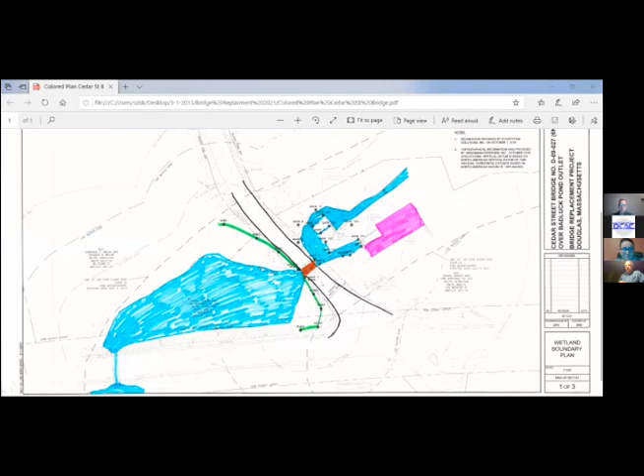A couple of years ago, Massachusetts started a small bridge program, and the town was awarded a grant in the amount of $500,000 in 2019, so that's where we're starting. The current bridge is only 17 feet wide, and our current design calls for a 24-foot wide structure—it's going to be a four-sided box culvert.

So, 24 feet wide. We did actually look at something wider to allow for better pedestrian access, but the environmental impacts going beyond 24 feet are quite significant. So 24 feet is a lot better right now than the 17 feet that's out there, in terms of both traffic and at least pedestrians walking across the bridge.

We are also widening the roadway a little bit down towards Webster Street. We're actually closing off one of the radii, as you're taking a right turn from Webster down to Cedar Street, so you can do that at a good speed. We're cutting back a lot on that radius, which is pretty much turning the existing pavement out there back to loam and seed that area at the bottom.

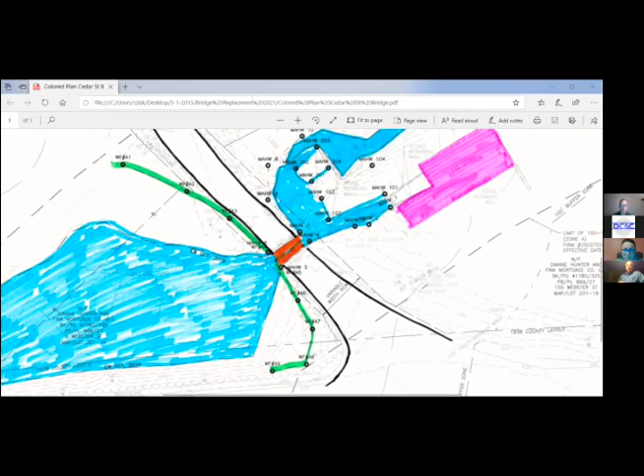And then towards the top too, we're doing a little bit of widening. If you're familiar with that, especially coming southbound, you're almost on a blind curve, both vertical and horizontal, so we're doing a little bit of widening there. I guess there's been a few accidents, and I want to say the town administrator either got into an accident there or was pretty close to doing it.

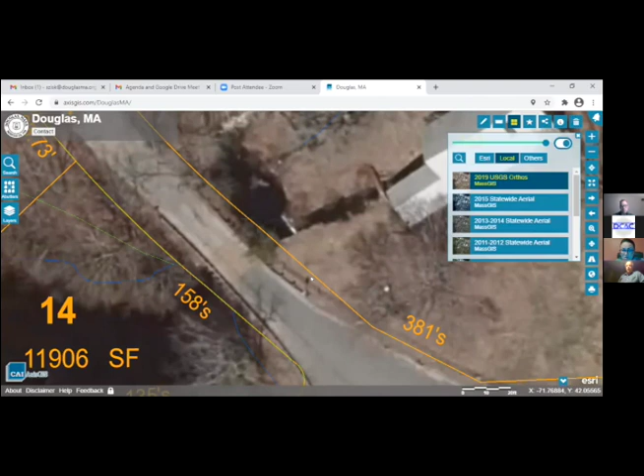So he was advocating to widen out that corner a little bit. We did as much as possible, but we can't do much - we wanted to keep the alignment of the bridge itself. And if you notice, and Kim will get into it, and Ken a little bit more, we're holding the east side of the bridge where it presently is. We didn't want to impact any of the property associated with the old mill, plus as you get into that area, we're dealing with some old retaining walls going into the raceway down to the mill and also to the dam on that side. So all of our widening is actually along the west side of the roadway.

Town meeting voted - there were some takings involved and some permanent and temporary easements - and town meeting voted on that a few weeks ago. And actually all the layouts were recorded just last week at the Registry of Deeds.

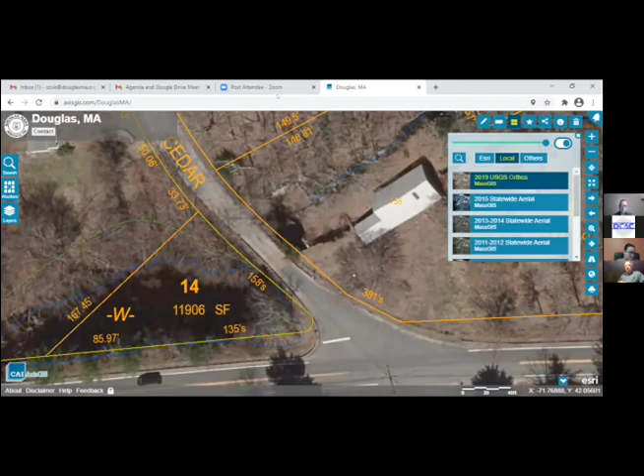I want to turn it over a little bit to Kim Armstrong. Oh, before I forget - Tracy, you were talking about, we do have copies of Mcguire's original design for the 2011 bridge, I don't know if that helps. We don't have any as-builts, but we have the original. Okay, could you just forward those to Steve? Yeah, he'll just pop them in our Google Drive. Sure.

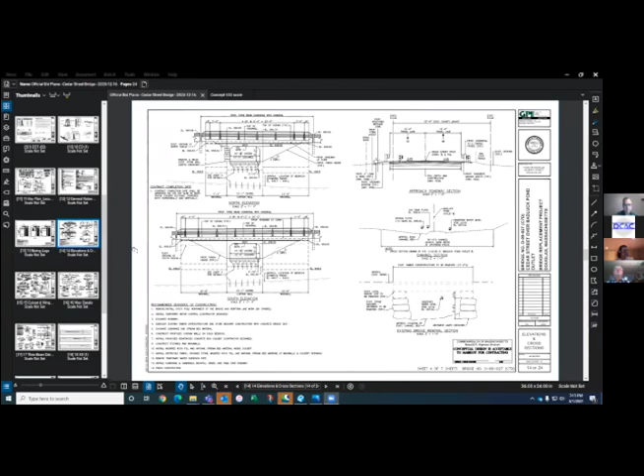Okay, so can everyone see my screen? Yes, should be a plan view. So this is basically what we're putting back for an elevation view of the bridge. So it's a four-sided box. The reason we actually did that is because it's scour stable.

And according to our geotechnical investigation, the bedrock's actually pretty high, so we can pin it into bedrock and cut off scour on both sides. So for future maintenance, there should be none associated with this one. We're also coming back in with retaining walls, mainly just so we can put the highway guardrail transition - I'm sorry, the highway guardrail itself, on top of the rails, just to help protect the roadway.

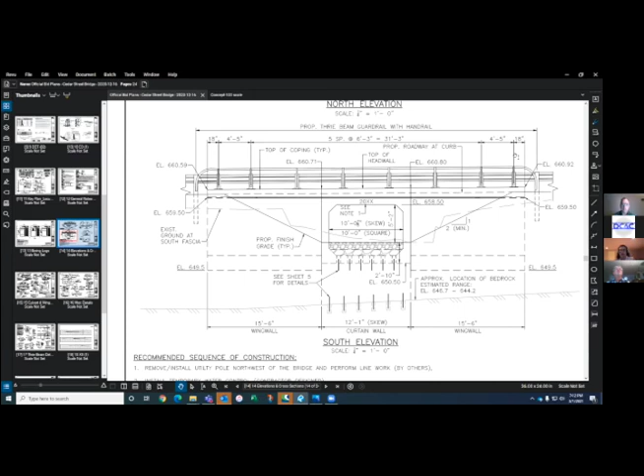We did what we could to minimize impacts. There is some stone that's going in on the openings, really just to kind of help armor the approaches to it and to help protect those retaining walls. And then we have - this is where we're anticipating the water control actually be installed, and then they're going to use a bypass pipe in order to have temporary water flow through here. That's what this is right here. I don't know if you can see my mouse, but...

I guess I don't know what you want to know, but I can keep going if there's any questions. No, I think if you just kind of focus in on the impacts - the increase in impacts, the percentages - if you want to just give us a general overview on the expansion versus the existing, versus your expansion into the resource areas. Okay, Kenny, I think that you're actually probably better at that.

I can pull up the - or if you want a screen share, that's fine too. If you're trying to talk, you're still muted. Yeah, okay. Do you have access to the three wetland sheets, Kim? I do, give me 2 seconds. Why don't we pull up the first one that has the multiple resource areas there?

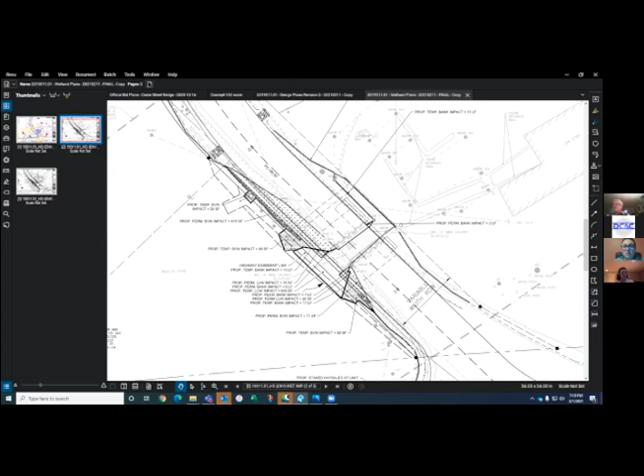I'm looking at the work around the edge. I see there's a 20 square foot impact to the BVW. Is that just on that side, or is that the whole project?

Actually, don't we have a chart? Looks like each one of these kind of outriggings of the structure has a BVW impact of various numbers of square feet. It looked like they're quantified there. Right, wherever the arrow points to is where that specific impact is.

Okay, so the project isn't just the bridge, it's whatever needs to be added to reinforce that chunk of road. Correct. This section here is for our utility pole.

So is this more like a retaining wall structure, or is this going to be an incredibly steep slope? There's going to be retaining walls on the sides of it in order to minimize the slopes. Okay.

And you can see the total impact area on the left side underneath the legend. Yeah, right there. I'm sorry I didn't review this before, I'm sure a lot of our questions can be answered on the prints. No, it's no problem.

Okay, so there's no riprap in this project at all, it's either just retaining wall and the impact has been reduced because you're surrounded by wetlands. There is some riprap as far as going through the stream at the openings. We are armoring right at the opening of it, but we're covering it with natural stream bed material.

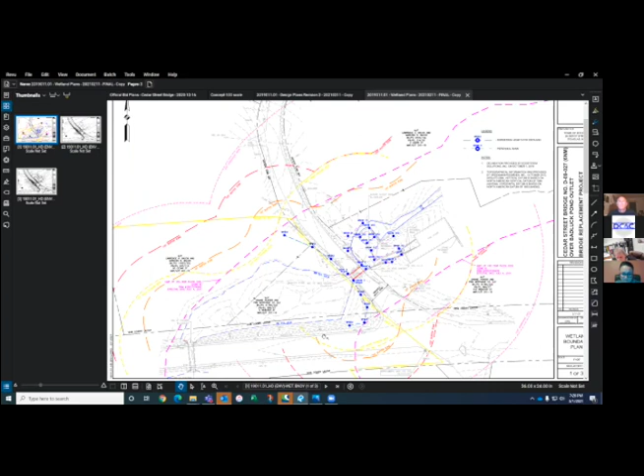Starting with the culvert itself, you have a bank area associated with that, identified by mean high water flags 1 through about 10. Then we have the bank area associated with the surveyed high water mark of Bad Luck Pond, done in October of 2019. Associated with that bank area, we also have BVW areas, defined by the wet flags A1 through A9.

Overlaying that, we are within a mapped FEMA flood zone, and we also have riverfront area associated with the bank areas. We also have a natural heritage overlay over the pond area on the westerly side, which you should have in your files. We have the sign-off from the Natural Heritage and Endangered Species Program for the portion of the work within that resource area.

Hello, Steve, yeah, or anybody? Steve, did you get the correspondence from Natural Heritage? I believe I forwarded that on to all the members. Okay, so I think the only thing we're really waiting on right now is comments from the DEP and the issuance of the file number.

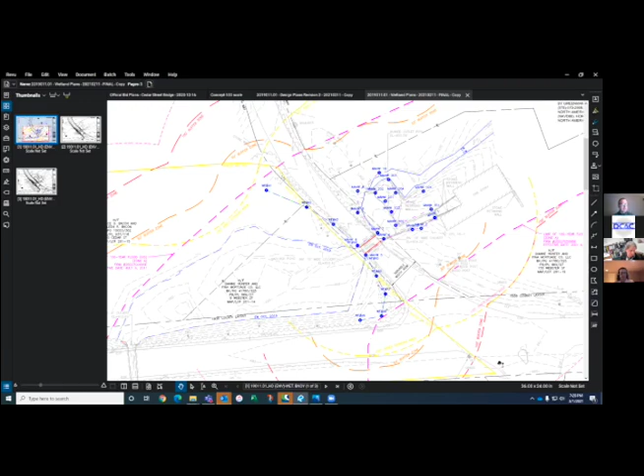So if we could go to the next sheet, the wetland impact plan. There we go.

What we've done, keeping it in the simplest terms, let's start with the BVW, because it's really associated with the widening of the roadway, a requirement of Mass DOT under the Chapter 85 review. This stippled area is basically the area of BVW that's unavoidable - we're going to have a permanent impact of 486 square feet. We intentionally kept that under the 500 square foot threshold, which under 310 CMR 10.55 allows the commission at their discretion to permit alteration of up to 500 square feet of wetland without requiring replication.

We've had situations on similar projects where clearing trees to plant trees or vegetation just doesn't make much sense. You've got a sustainable wetland system around that pond, and to go in there and alter the buffer zone, regrade, and create a wetland replication for an area we've kept under the threshold within permissible limits just didn't make too much sense. But I'll defer to the commission's judgment on this after you've seen the site and taken a look at the conditions out there.

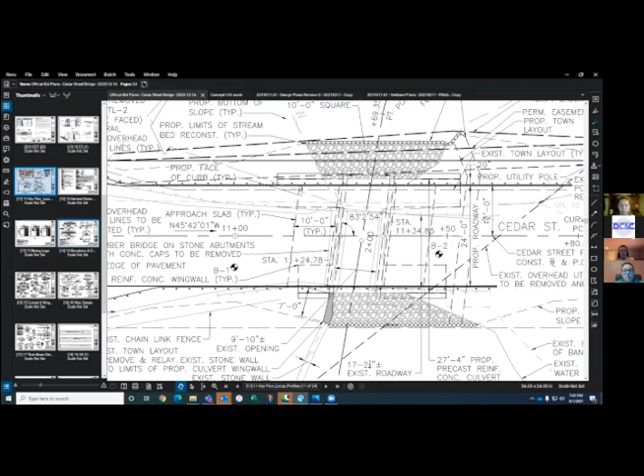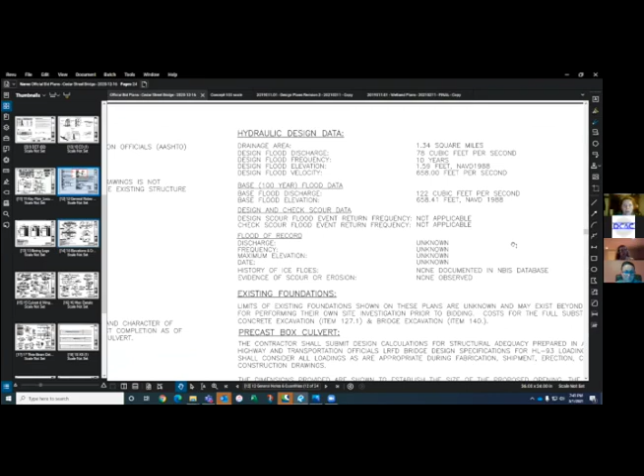Quick question, since this is a large file - do you have flow rates in this plan somewhere? They're in the hydraulic report. Actually, on the next page after this one, we have notes with the hydraulic design data and flows. It's page 12, if that helps.

Is there going to be any impact on any trees with this project?

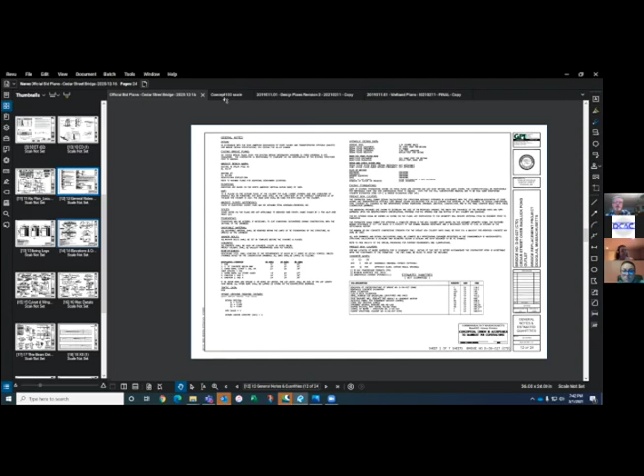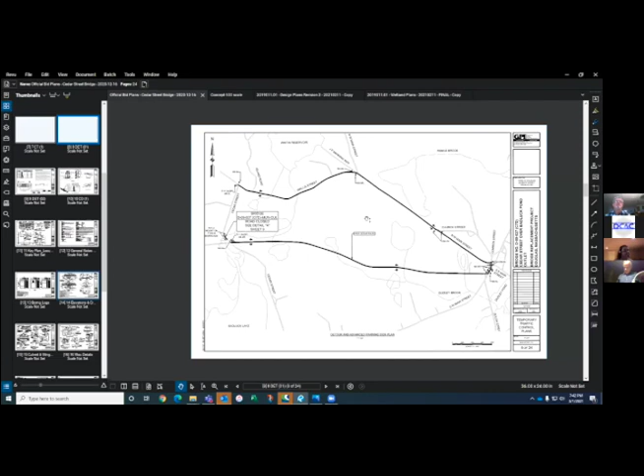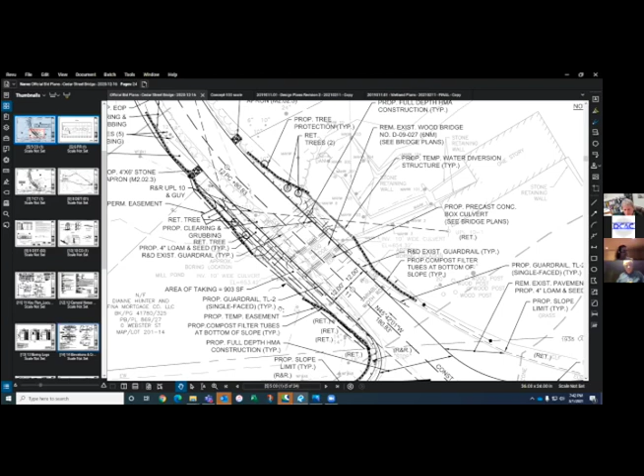Kim, it's Jim Noyes. Let me pull up that plan - I think it's sheet 5 on our plans, the construction plan. There's a cluster of 2 to 3 trees down towards here that are being retained. Let me go a little higher up - there they are, remove trees. There's 4 or 5 trees right as you're coming south, right before the bridge. There's a little wall on that Bacon property - if anybody's familiar with that area - but there's 4 or 5 trees there that need to come out, with a little bit of clearing and grubbing.

Okay, Art, are you good for now? Well, I see the 5 trees that you're talking about. Are you going to replace them after the project's completed?

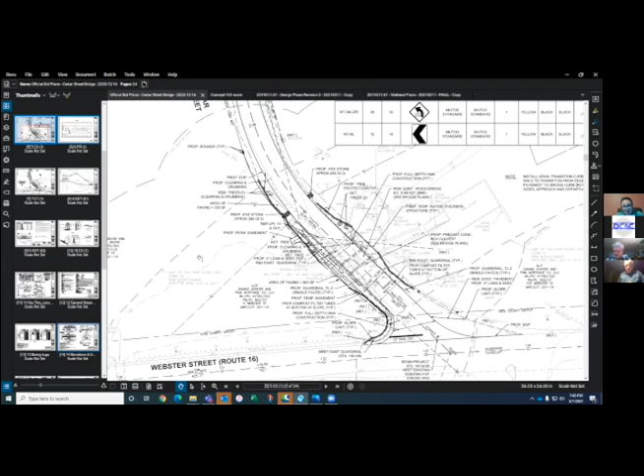It's something that can be considered. We hadn't considered it, but yeah, it's something that can be considered. They shouldn't be anywhere near the bridge though, for the replacement. Otherwise, we'll be back in a few years. So alternatively, where would you want to see them plant the trees that would have the same equal benefit that those trees are giving right now?

Yeah, there's no DEP number issued. Also, DEP does have those proposed alterations and replacement like you had submitted. So I would just get an answer before March 15th on what their opinion is on that, because it does look like you're altering and then you're replacing the same. So if you could just double check with them, because it is on the DEP website.

Thank you. And Tracy, can we just ask the applicants to submit the green cards, if they can scan them and send them to me with the abutters list? Yeah, applicant, send those over. I thought that was on the checklist, that it was done. The NOI checklist - yeah, they sent the abutters list. I didn't get the green cards back. I don't know where they are. Okay, yeah, I have them here. Could you scan them and email them? Yep, will do. It says the first one, green card submitted, X. Okay, all right, good.

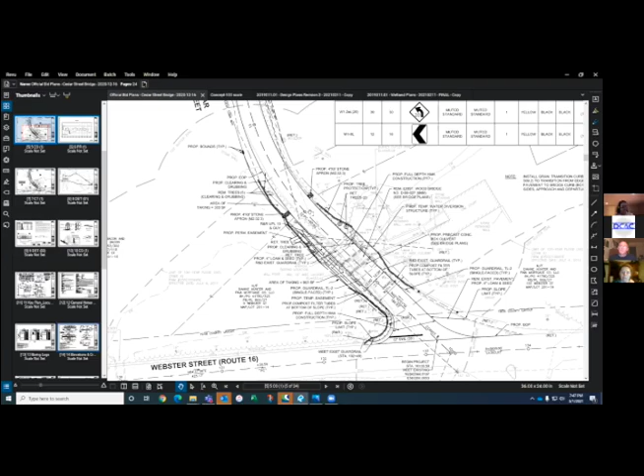And is there a retaining wall on the other side? Yes, all 4 corners required a retaining wall. Some of them are shorter than others. I can go back to my plan, it shows it better. This is the foundation plan, it kind of shows it a little easier, but all four corners have a wall.

It's such a historic area. Town may not care about aesthetics, but I kind of do. Is there any option to do a vegetated finish on that wall face? We try really hard not to put plants on the walls just to help them last a little longer. Right, I'm just throwing it out there. Again, we could ask the contractor about a form liner and see if that changes anything, but I don't want to tell you yes we can, because that'd be something the town would have to make the decision on.

I mean, I think it is what it is. It's number one, safety. So, I'm just throwing it out there.

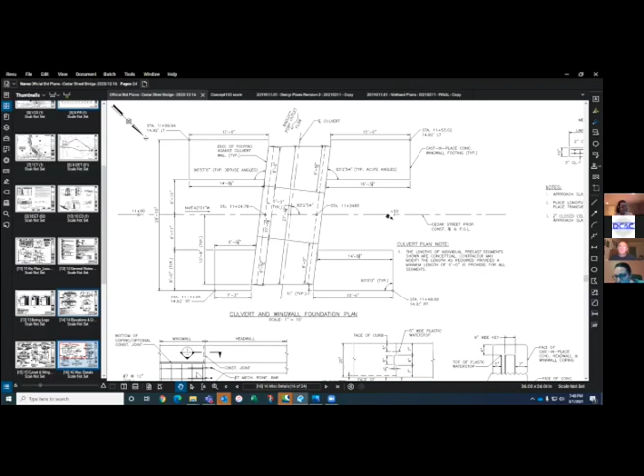Okay, anyone else on the board? And just one other point I wanted to make, you can see on these that there's very minimal areas that will actually be exposed. See, this is the grade line. So all you're going to see of the wall that we could actually put a form liner on is this little piece here and then these pieces here. Okay, all right, thank you.

That's not much. We tried really to minimize the impacts as much as we could. The walls look a lot bigger than they are, but it's really just because we needed to get the anchorage and we were trying to catch the bedrock, and then make sure we could make the grades really work. That's how the lengths were determined.

Sorry, I heard someone talking but couldn't hear what they said. Katie Grace, could you repeat that? What did you just say? Oh, I was saying if you could get some really tall cattails to grow right there. Okay, I'm just- okay.

Eric, anything? No. Mike, anything from you? No. Okay, all right. I think I had a question about the sand hump.

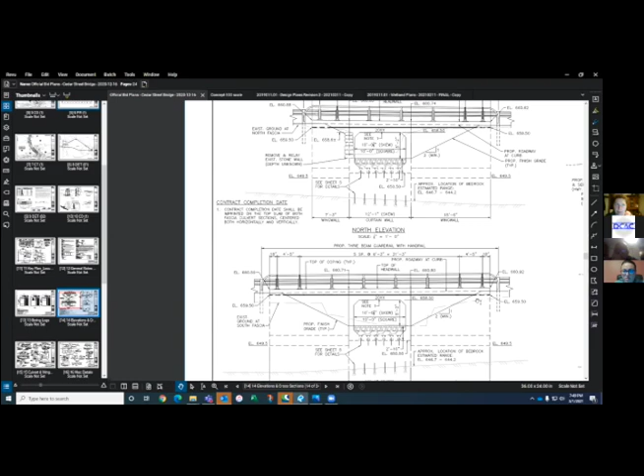The sand- yeah, so you said you were going to take out a sand hump. Oh, the bump, a sediment hump I should say. It's sediment, yes. Okay, actually one of these is going to have a cross section through it.

I'm only curious if that is a naturally occurring sand hump or if that's related at all to the road sand that probably collects there. We think it's actually based on sediment falling out because at the dam it slows the water down so much that the sediment has enough time to fall out of the stream, and it just built up more of a section right at the opening of the dam.

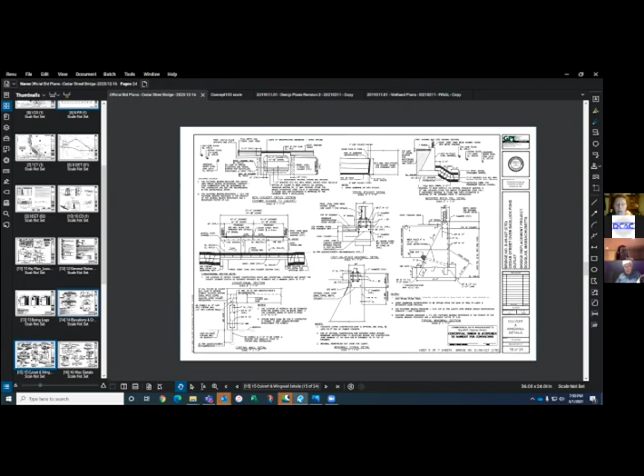Okay, Kim, if you go to sheet 19 and the top cross section 1130, you can see that hump right there in the dashed line. And it's not a lot, we're only talking about a foot between the lowest point and the highest point, but-

I know, like you look at a lot of the culverts in town and you can see there's a lot of road sand buildup in some areas. And I didn't know if that was occurring here, and if it was, is there a way that we were going to prevent that?

I wondered if, if nothing else, having the cement structure as opposed to a wooden bridge would guide sediment potentially away from going into the stream bed. The curbs will definitely help with that, and that's one of the reasons we prefer to use curbs over bridges, really just to try to redirect the flow. So now there's actually, as you can see, a little step here, so you'd have to have a pretty substantial flood before you'd actually go over the curb.

Okay, thank you. No problem.

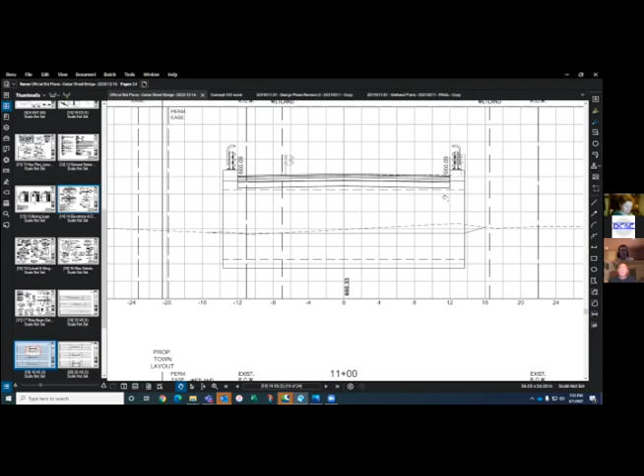Are there drainage inlets on either of the four corners of the bridge, or the entries into the bridge, that will pick up the water and then put it where? Directly into the brook?

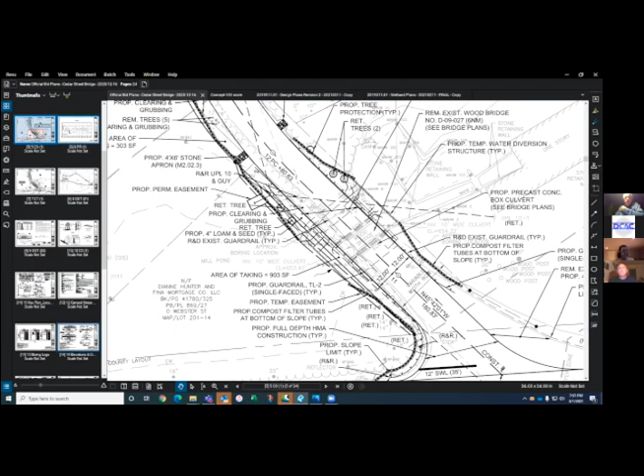Jim, do you want to field that? We have- right, the profiles are basically the same as it is now. The runoff right now goes out through just natural country drainage, and what we're putting in at the low point is a couple of stone swales and then just having it go out. But nothing is directly into the water itself, it'll go through the stone aprons and just migrate out to the water.

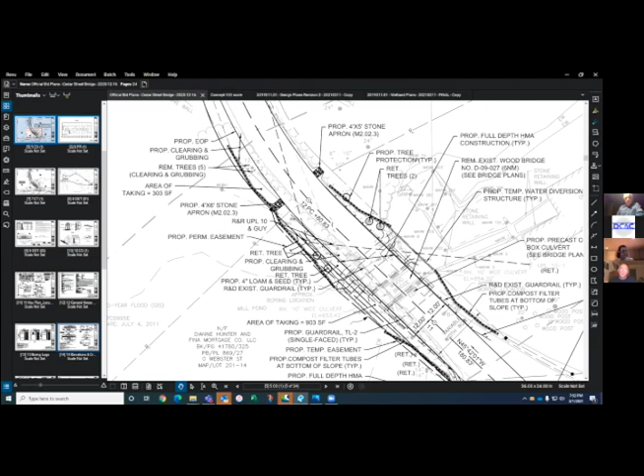So there's a slope on the roadway from the bridge towards those outfalls, and then it drains off. Okay, and thank you. This is the low point, basically that's what it's doing right now. We're not changing anything.

Wait, the current roadway doesn't have curbs on it, does it? No, and the only spot on this new design, we'll just have curbing over the culvert, and then we'll transition back down on both sides.

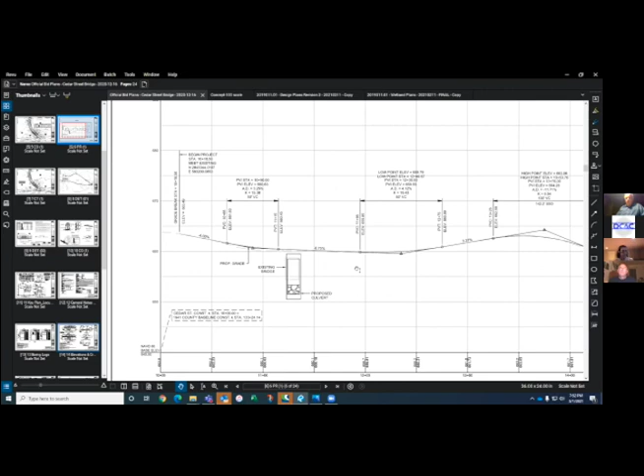So as you're going down the road from Webster Street, you'll be going over- that'll all be, let me double check the plan to make sure, but that'll all be just edge of pavement until you get to the bridge itself, and then you have that bridge curb. The limits are, I don't know if you can see the mouse, but these two lines where the retaining walls end- basically after that we can tie back in for the slopes for the posts for the railing.

So we don't have to have the curb anymore. There'll be a transition piece that comes off just past these limits of the walls, and then after that it goes back to the country drainage type of setup.

Trying to think if I can- yeah, I think the last thing we wanted to do is have it collect this in catch basins and then introduce a new point discharge. We'd rather keep it the way it is right now and just have them flow off the side of the road on both sides. So that's the limit of our full height, which is an 8-inch curb.

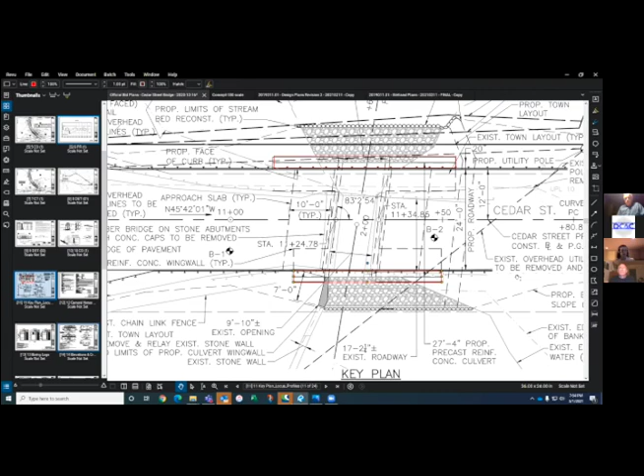And what are you proposing for erosion control during construction on the old mill side of the construction area?

Oh, this is the curb transition, just if that helps you out. After we finish on the bridge curb, we just do one piece, which is a 6-foot transition.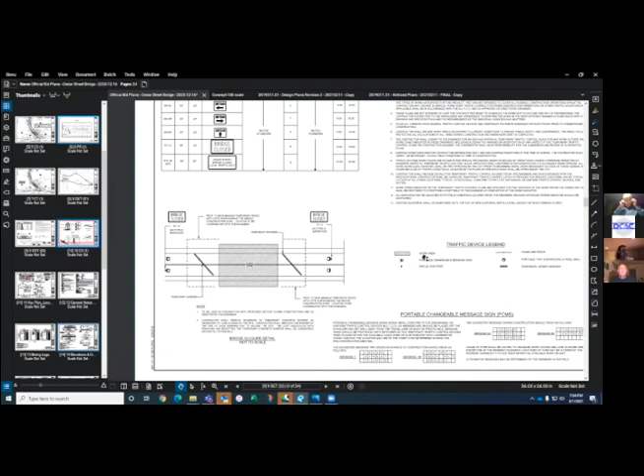So, hay bales. And then this in here is the water control.

Is that in the water? No, this is the water itself. They're likely going to do sheet piling, but it's set up so they could do sandbags if they prefer, depending on how much height they have compared to the water level at the bottom. So they may set the sandbags right in the water, right in the pond.

Correct, and usually we're not talking about the little 1x1 sandbags you can pick up. These are ones that are usually 3 feet by 3 feet, and they pick them up with an excavator and move them. So they're much more substantial.

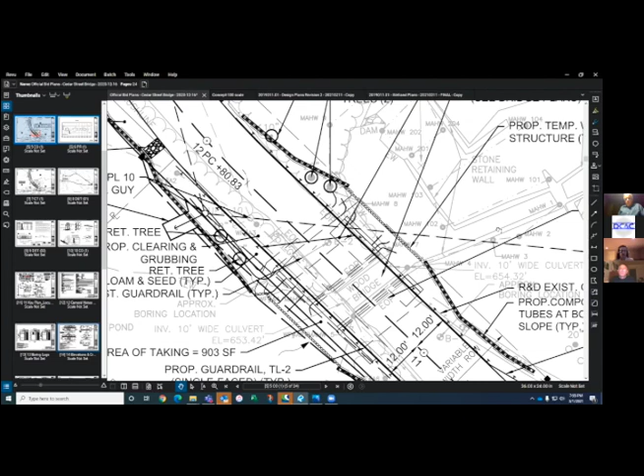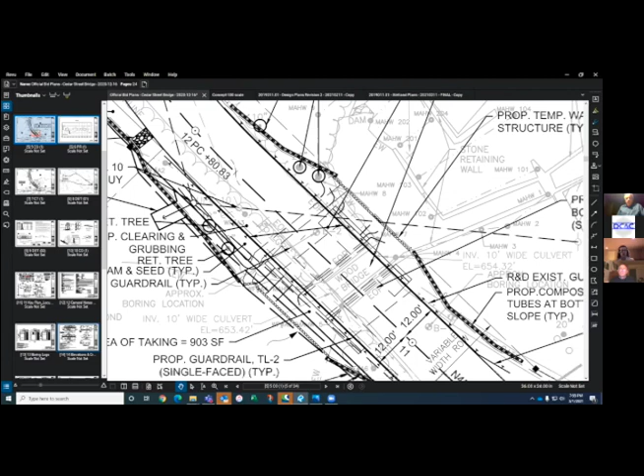And just hay bales for erosion control on the sides? Yes. Actually we call for compost filter tubes, which we used on the North Street retaining wall a couple of years ago when that collapsed. I believe at the time the commission wanted compost filter tubes, so we were just trying to replicate what was done in the past.

Okay, thank you. Okay board, I think they've done a great job with the presentation. I think we can do a site walk and be ready for the next meeting.

Yeah, I just want to make sure, Tracy, because I gave him a copy of my comment sheets too, and I had my comment sheet I was going over. I must have thought I had green cards from another file when I saw them. Do you guys know if all the abutters were notified?

I have, Steve? I'm sorry, I have, let's see, I'm just trying to send you a photo of it. I have 5 of the green cards came back. Do you know which ones didn't? I'd have to look at the list, Steve, I don't have it within arm's length right now. I can send you that tomorrow.

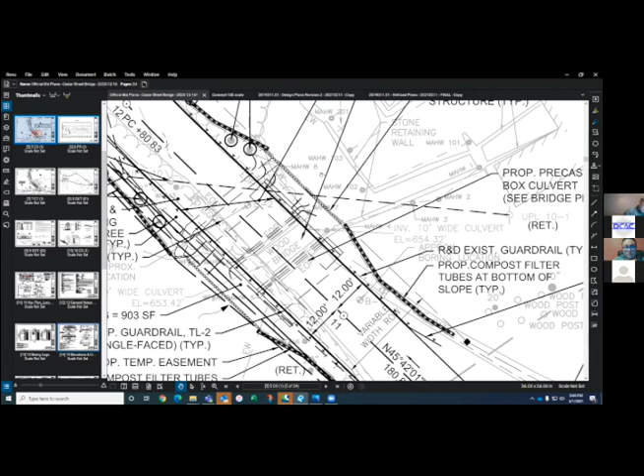I've got one more comment, Bob and Eric. Those cluster of 5 trees that will be removed, they've basically been debarked during the past few years by the front end of vehicles. That's where all the accidents occur, as vehicles fail to negotiate that turn left at that point, they end up right in the face of those 5 trees. Thank you.

So Mark, you could take a look at those trees when you go out there. Steve, how are we looking for March 15th? Well, we have 1 through 6 for Joseph Road, which is kind of a package, and then we would have Cedar Street, and then for old business, and then for new business we have an RDA for Woodland Road, which would be... Let's put this one on first for old business.

Okay, I'll entertain a motion to continue. So move. Second. Motion's made by Art, seconded by Mark. Okay, roll call vote to continue. Art Montverde, aye. Mike Greco, aye. Eric Harris, aye. Mark Manjamai, aye. KG Dudley, aye. Thank you very much. Okay, so we will see you on the 15th.

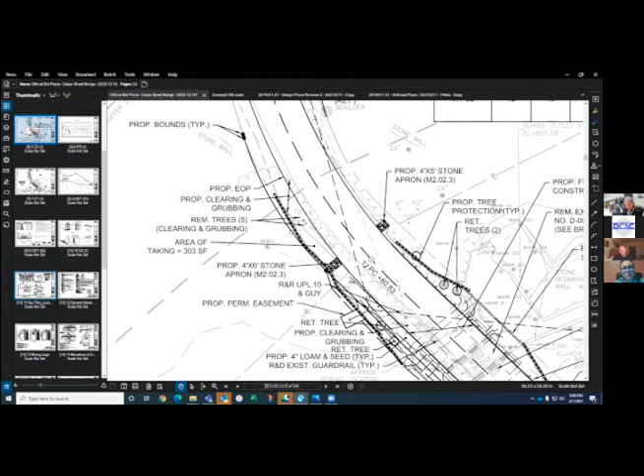Okay, board, we all set? Steve, you have anything else? I'm good. Okay, so board, I've circulated the Adobe sign, so if you could take a look at your email. Steve, did you put the revised plot plans in our Google Drive according to those? Because I didn't send those because I can't really send them easily.

You want to talk about 130 at all? Just how I went out to town council. Yeah, so I think there was a little bit of misunderstanding on what vote carries through conservation versus planning board. So if you could utilize the handbook, we don't really want to ruin somebody's night over something that was incorrect. So we don't do super majorities, that's something for planning board. We do just majority, and as far as signatures go, the person signing doesn't necessarily need to vote in the affirmative for that specific project. It's simply for signatures from board members, so it doesn't invalidate or lessen the negative vote or the no vote. It's just simply a process that needs to be done, not necessarily signifying for or against the project.